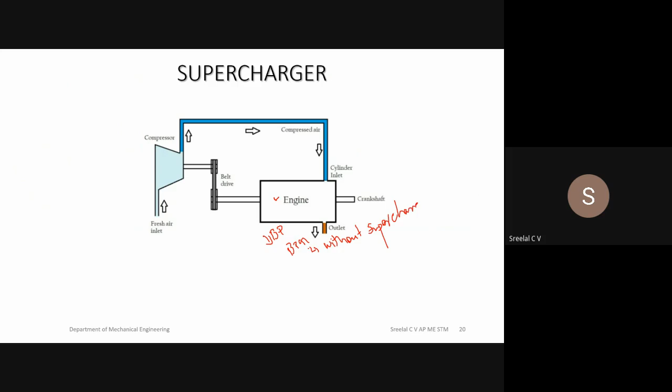Okay, so in the case of turbocharger, here we are not taking any power from the engine. Instead of that we are utilizing the exhaust gas. This exhaust gas will be spinning the turbine, and this particular thing happens such that it will be pressurizing the atmospheric air.

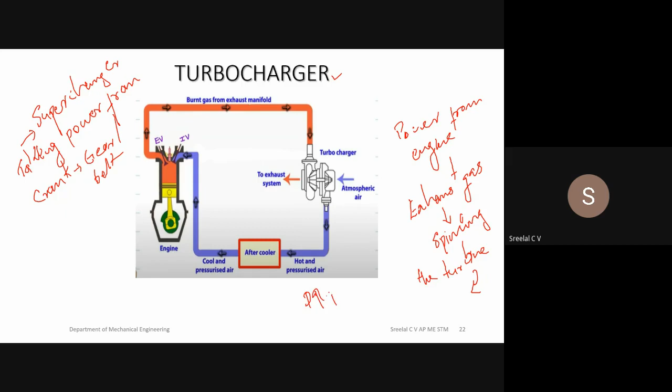One more thing you have to add here is as the pressure increases, the temperature also increases. So in order to reduce that temperature, we are using an air cooler, sorry, after cooler, also called intercooler. So this hot air gets cooled, and then it is given to the chamber.

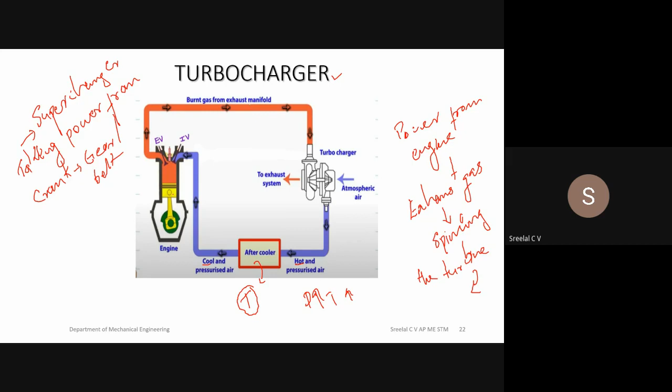This is the process. So while explaining this supercharger as well as turbocharger, you first have to start with the mean effective pressure, then what are the conditions for that, the maximum power, and everything. Then you can write this equation and explain why we are not considering these two, and we cannot consider this due to the fuel economy and the frictional power loss.

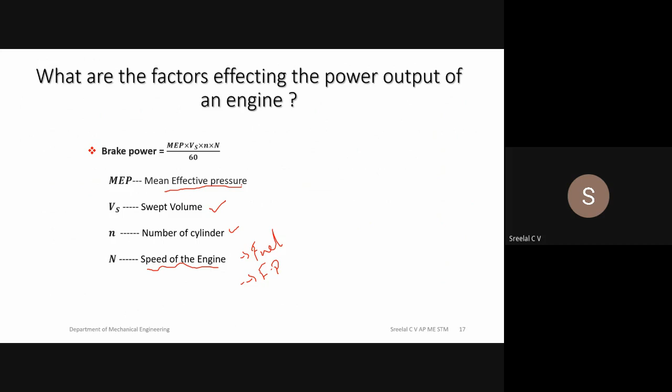So we have to control this particular factor in order to increase the power output. This was the last topic we discussed in the last class. So the classifications are there, and for this I didn't see a question to define all these things, but still I will be sharing a pdf for you. You can note it down: centrifugal, rotor, and vane. It is a very simple topic, so we don't need to spend much time, just simple topics which give us marks. Okay.

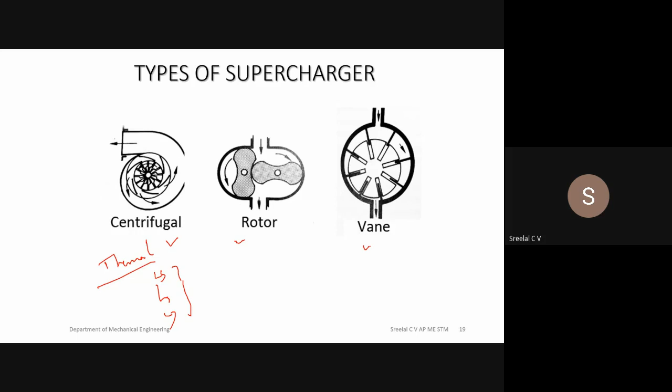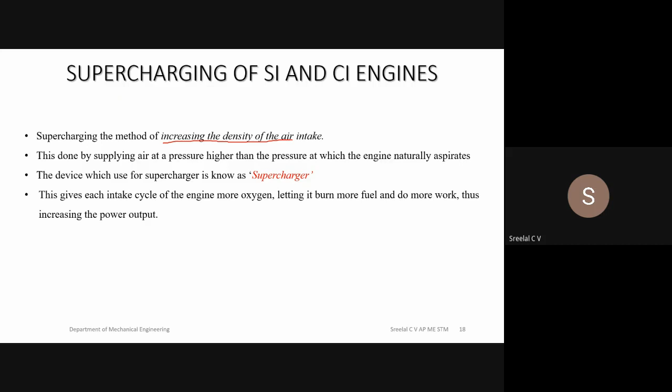Okay sir. So now we are going to discuss the benefits of supercharger. As we told, supercharging means increasing the density of the air intake. As a result, what will happen? Efficient combustion of the fuel takes place, and as a result we will be getting more power. That was the first one.

Here the density of the intake air increases, as well as the mass of air intake increases, and we know that as a result the volumetric efficiency will be increased.

So here, first of all, volumetric efficiency — you have to remember what is volumetric efficiency. We already discussed about it. If you remember, I will just give a definition for that.

It is the ratio of actual volume of the charge drawn into the chamber during the suction stroke, divided by the swept volume.

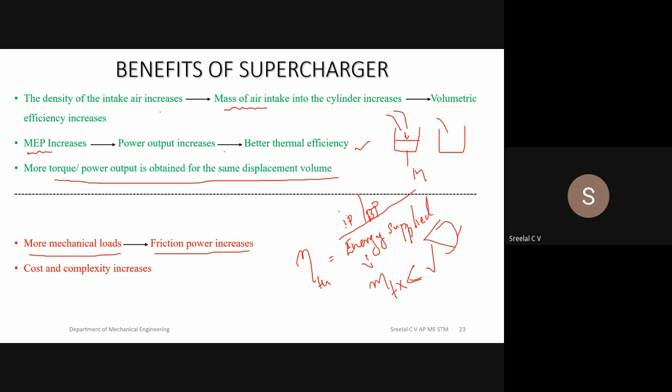So we are going to discuss the demerits of this particular supercharger. The first one is more mechanical load, and the more frictional power or frictional loss will be increased, and the cost and complexity of that particular engine will be increased. So these are the main things. So while writing, you have to add on these points. Understood?

Hello? Hello? Yes, sir. Okay, sir, okay.

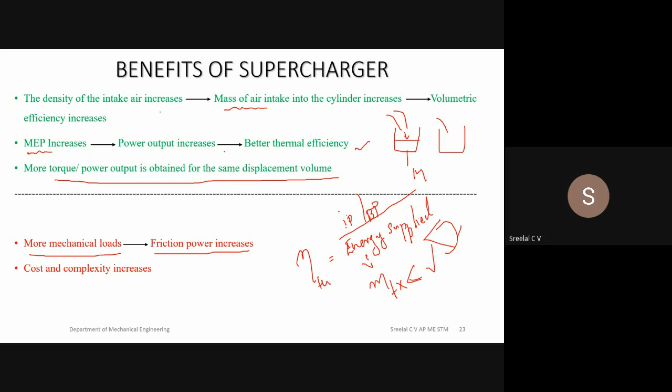Okay, so now we are going to move into the performance testing of IC engines. So still now we were discussing so many factors we use to understand the performance of an IC engine. So for understanding all these things, we are conducting so many tests.

Okay, a test for finding what is the brake power of a particular engine, or what will be the indicated power of a particular engine. So that we are going to discuss, we had to study three tests in this particular module, which is cited in your syllabus. So the first one is the Morse test. Do you remember, or have you ever heard about this particular thing?

So actually, for what are we doing this particular Morse test? Okay, tell me for what we are using this particular Morse test. Hello, do you know? To find the indicated power of each cylinder. Yeah, indicated power of each cylinder. Yeah, okay fine.

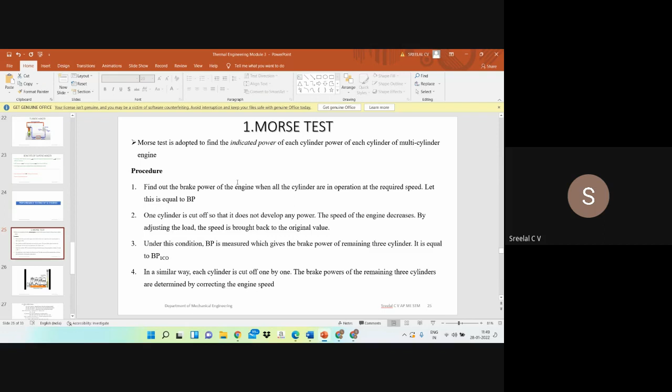So here, first you have to understand that this particular test is adopted to find the indicated power of each cylinder of a multi-cylinder engine.

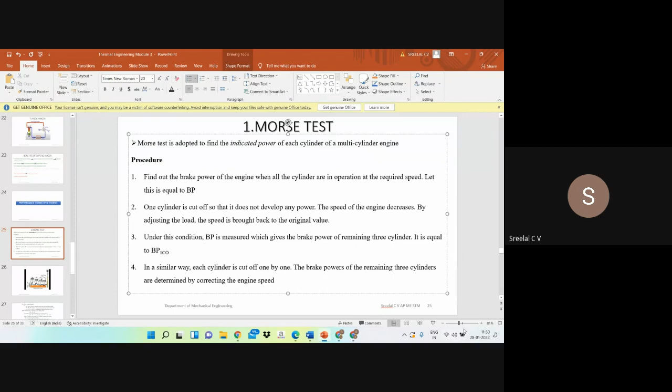First of all, you have to understand that we are not using any indicator diagram for this particular thing, so it is very simple. Just think, how many cylinders are here? Four cylinders are here.

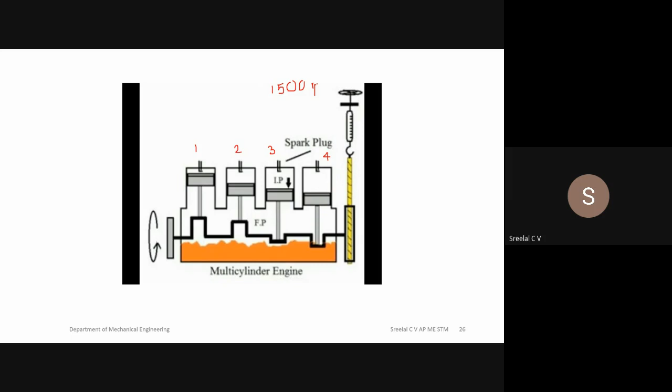So it is very simple: first we will start this particular engine and make it run at a rated speed, let's choose 1500 rpm. Then, using the rope brake dynamometer and everything, we will apply load over this and start the engine to run at that rated speed of 1500 rpm.

So at that time all four cylinders will be working, and then we will be finding the brake power. First of all we find the brake power.

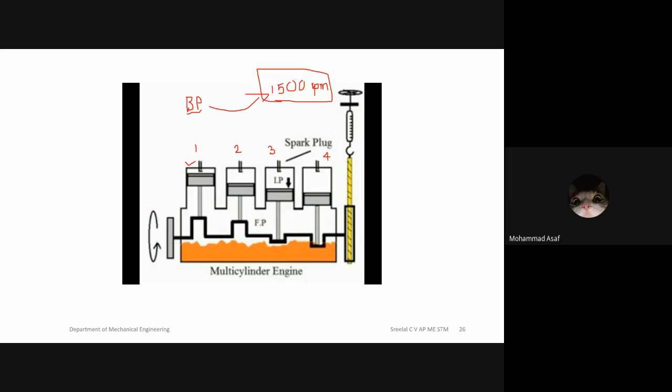Understood? Yes sir. Okay, but still you have to understand that this particular cylinder is connected with a shaft, right? So I am asking, if this particular cylinder is not producing power, will it still work or not?

Understood? My question is that we already cut the fuel flow to cylinder one. So I am asking whether, due to that, the motion of this piston will still be there or not.

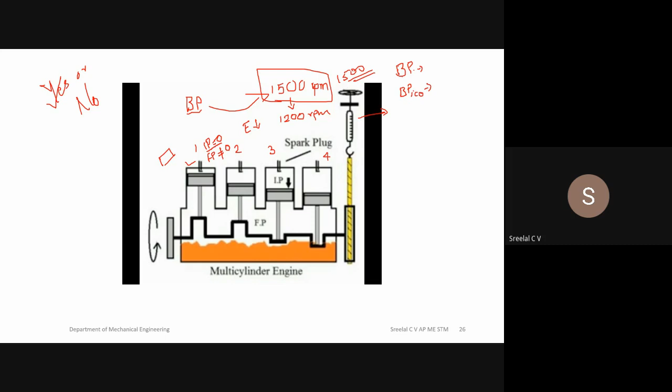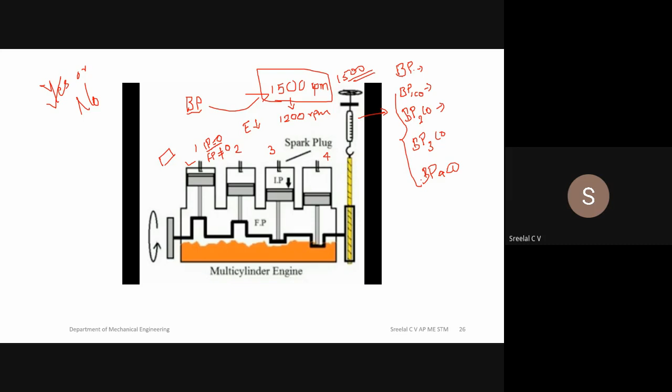First we get the braking power while all 4 cylinders are working. Next we get the braking power when cylinder 1 is arrested. Then we will cut off cylinder 2 and 3 and 4 similarly, and obtain this much data for each case.

So here we are taking IP1, IP2, IP3, IP4 as the indicated power of each individual cylinder. And frictional power for each individual cylinder we take as FP1, FP2, FP3, and so on. And BP1, BP2, BP3, BP4 for the brake power of each individual cylinder.

First of all, we take the total brake power. We already know that indicated power equals brake power plus friction power, so brake power equals indicated power minus FP. So here we get an equation: BP equals IP1 plus the 4 individual cylinders, minus the friction developed in each cylinder.

So if we are cutting the first cylinder, what happens? IP1 becomes 0. So the BP of the remaining three cylinders will be BP1CO equal to IP2 plus IP3 plus IP4 minus FP1. FP1 is there because, since the indicated power is not there, these cylinders are all connected with a single shaft, so the motion will still be there, and thus the frictional power or frictional loss will still be there.

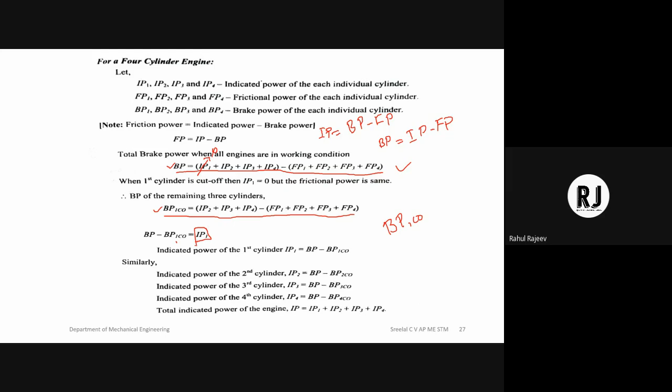Similarly, we already know BP1CO, BP2CO, BP3CO, and BP4CO. So for each of these, if we subtract from the BP which is obtained while all four cylinders are active, we get the corresponding IP1, IP2, IP3, and IP4. So the total indicated power, IP, will be IP1 plus IP2 plus IP3 plus IP4.

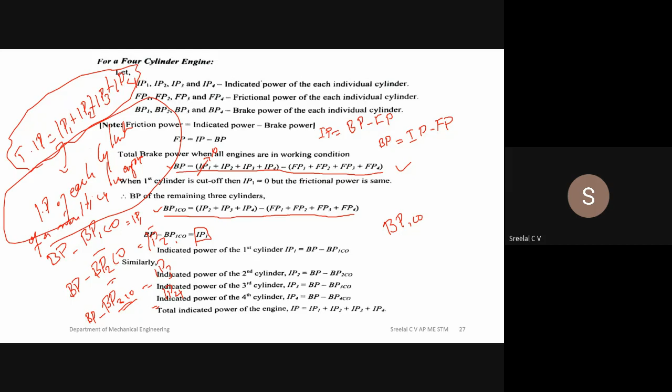So thereby we get the indicated power of each cylinder of a multi-cylinder engine. This was our motive. So this is the procedure. In a few examinations, I found there was a question asking to write this particular procedure, and while explaining it, the marks allotted for that were 5 or 7 or something like that.

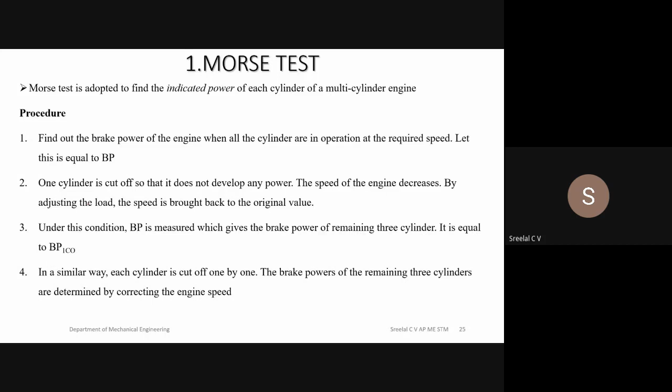So it is not a short answer. While writing the procedure, you have to give all this data. It will be very simple for you if you understand this particular thing.

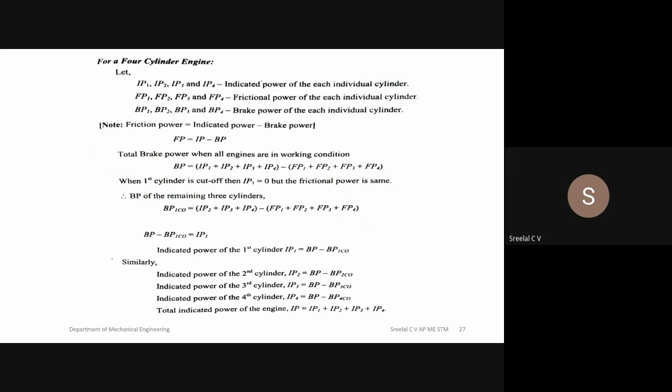Do you understand? Here, what is the brake power? What is the brake power with all cylinders working?

13 kilowatt, yeah, so first of all you can write all these things. So here BP is equal to 13 kilowatts. Then with the first cylinder cutoff we will be getting a BP as 9.3. So BP1CO equal to 9.3 kilowatt. Similarly, BP2CO, say second cylinder cutoff, we will be getting a brake power as...

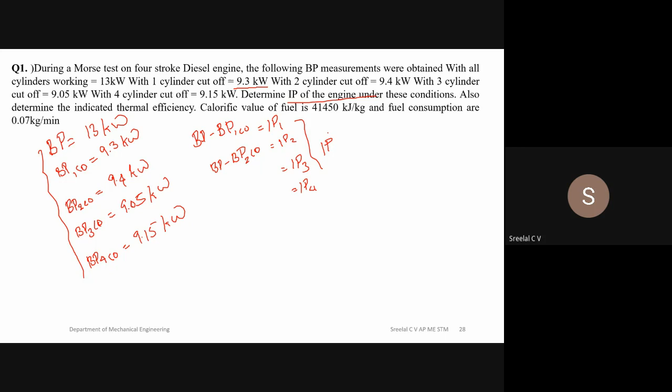Understood? Yes, sir. Yes, okay.

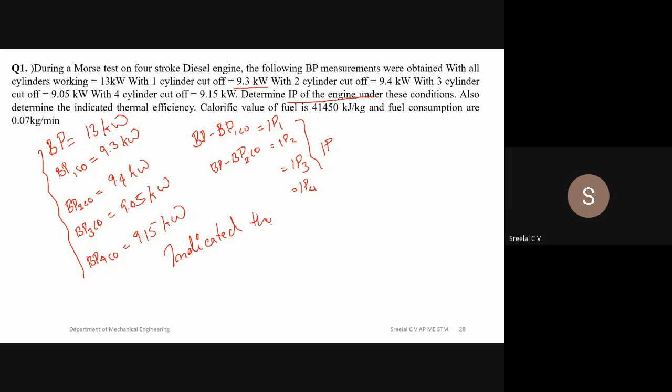Efficiency, okay, thermal efficiency. First of all, you have to know what is, we already discussed about the thermal efficiency. Thermal efficiency means the energy, here they ask as the indicated energy divided by the energy supplied, the energy supplied to the engine. So the energy is supplied to the engine in the form of what?

Energy, fuel is supplied, yeah, fuel. So the energy given by the fuel will be, we will be getting the mass flow rate into calorific value of the particular fuel.

So if here the question comes in the indicated power, right? They asked to determine the indicated power, or they will be asking the brake thermal efficiency also. So at that time what will happen? Instead of indicated power, brake power will be using. So this is the thing.

So here you have to understand that here it will be this particular thing. Actually this must be in the kilogram per second. So in most of the question, the question will be coming in like giving in the terms of kilogram per hour. So kilogram per hour will be the asking.

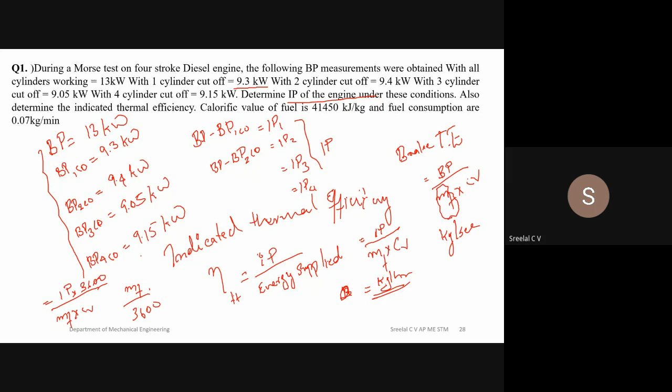Okay, so the particular thing will be, wait, so the indicated thermal efficiency will be IP into 3600 divided by...

MF into calorific value. This here it must be in kilogram per hour. So here it is given in minute.

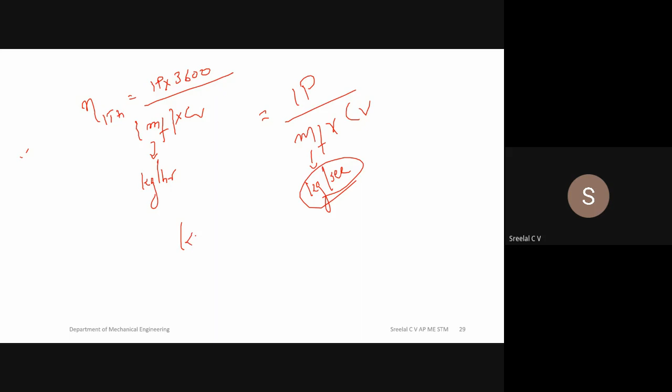So from this whole thing, if we are subtracting these things, we will be getting the indicated power. Indicated power will be obtained. Then the particular calorific value is already given.

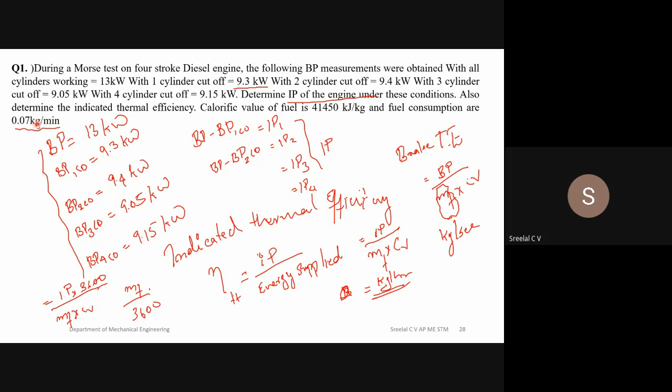Calorific value is given, and the conversion of this particular MF or the fuel consumption must take place. So the equation after substitution will be IP into 3600 divided by MF, which is in kilogram, into 41450. This will give you the indicated thermal efficiency.

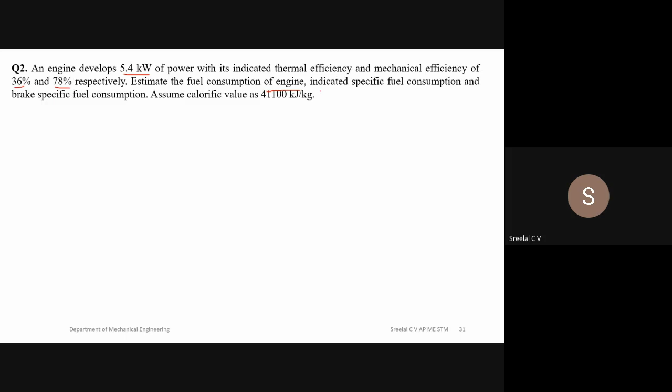So here they are giving an engine developing 5.4 kilowatt of power with its indicated thermal efficiency and mechanical efficiency as 36% and 78%. Estimate the fuel consumption of the engine, the indicated specific fuel consumption, and brake specific fuel consumption.

So given that the brake power is the engine development, the brake power will be 5.4 kilowatt, the indicated thermal efficiency is 36%, the mechanical efficiency is given as 78%, and the calorific value is given as 41,100 kilojoule per kilogram.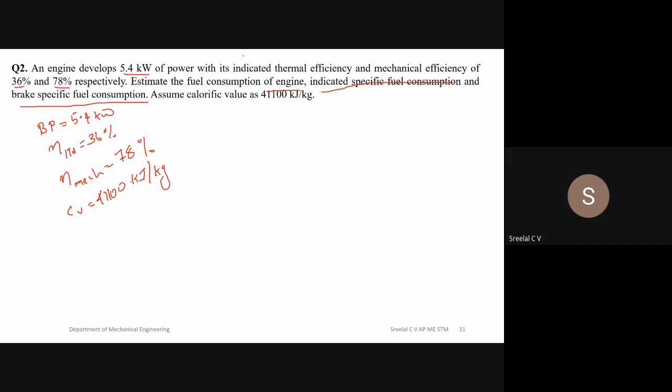This is given, and this is also given. We have to find this particular MF. But here the indicated power is not given. Instead of that, we are given with the mechanical efficiency as 78%. What is meant by mechanical efficiency?

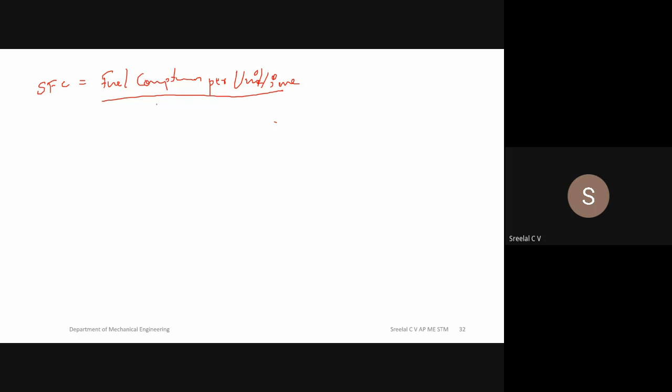So here they ask ISFC, that means MF by IP, as well as BSFC equal to MF by BP. Understood? Where did we get this BP from? Okay, this is just a formula.

So first of all, you have to find the IP from the equation for the mechanical efficiency, and we can substitute that particular IP value in the indicated thermal efficiency, and we will be getting the mass flow rate, or the fuel consumption of the engine. So that particular fuel consumption of the engine divided by the IP given will give the indicated specific fuel consumption as well as the brake specific fuel consumption.